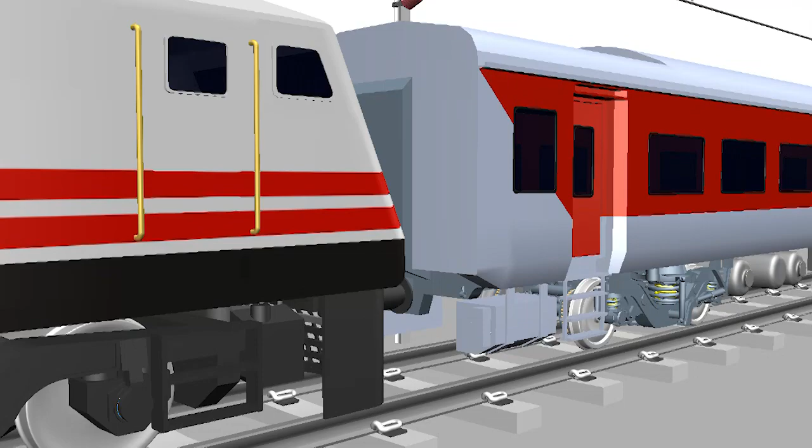The free vibration of the railway bogie is an important area. That's why a suspension system is used to improve the ride comfort of the passengers. Fiat bogies are used in LHB coaches.

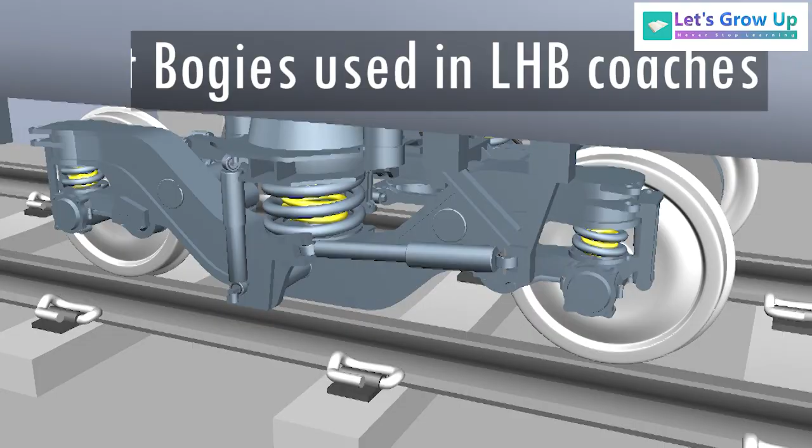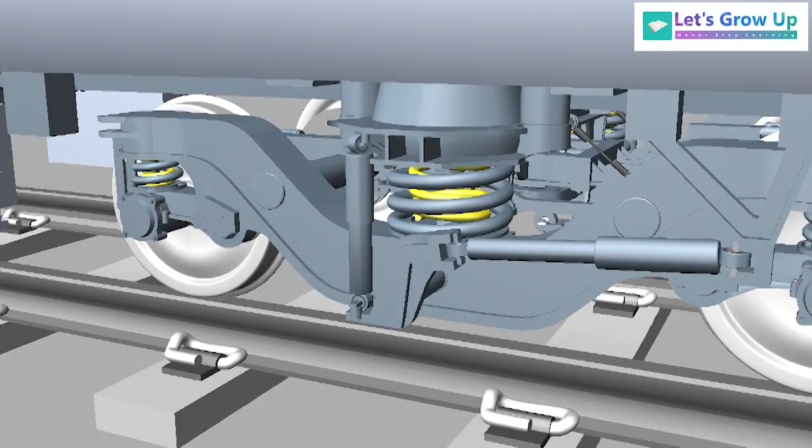It is a two-axle type and two-stage suspension system. This suspension provides a better journey for the passengers. To maintain a smooth and safe journey, an anti-roll bar is used in the LHB bogie. It is a part of the secondary suspension system. Today, in this video, we will learn about the anti-roll bar system.

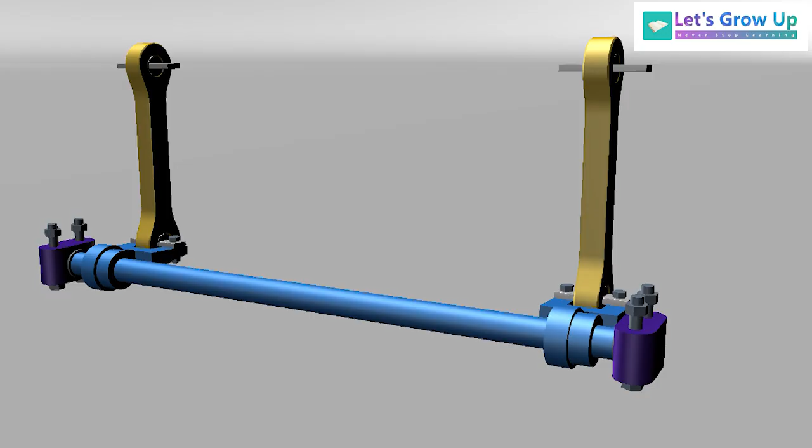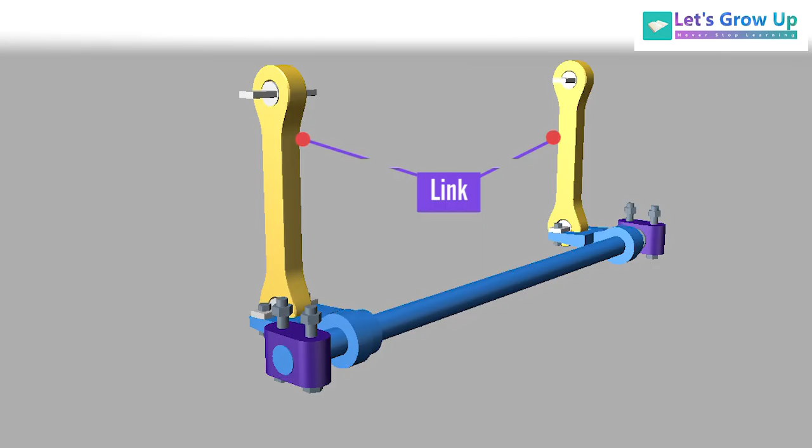It is located under the bolster and between the side bogie frame. The complete anti-roll bar assembly consists of torsion bar, links, levers, and support bearings.

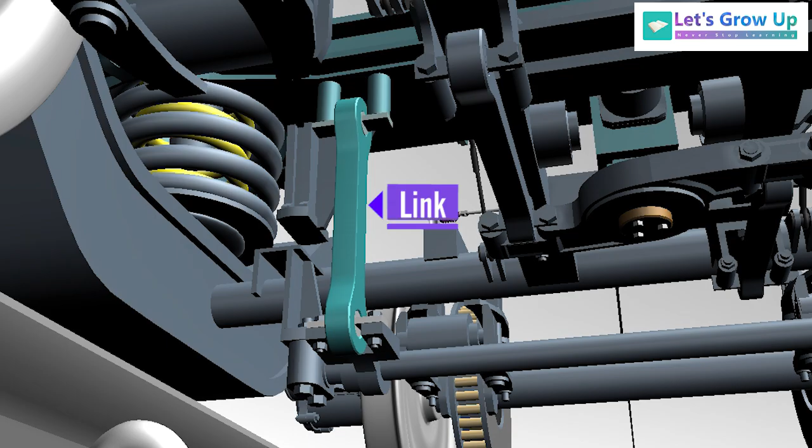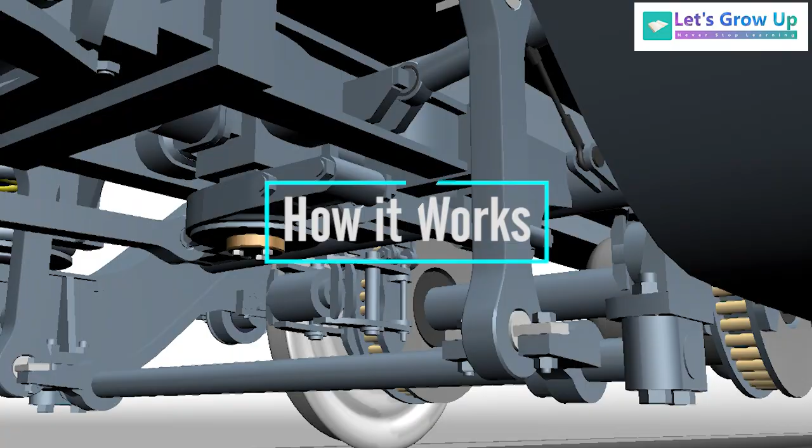The anti-roll bar is connected with the bolster beam with the help of link bars, and rests on the brackets connected with the frame. Let's see how it works. The anti-roll bar helps to reduce body roll when a train is running. Do you know the body roll? I am sharing it through this graphic.

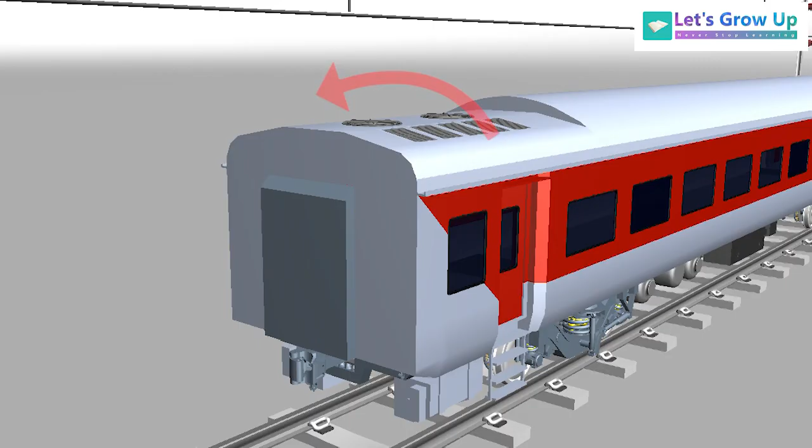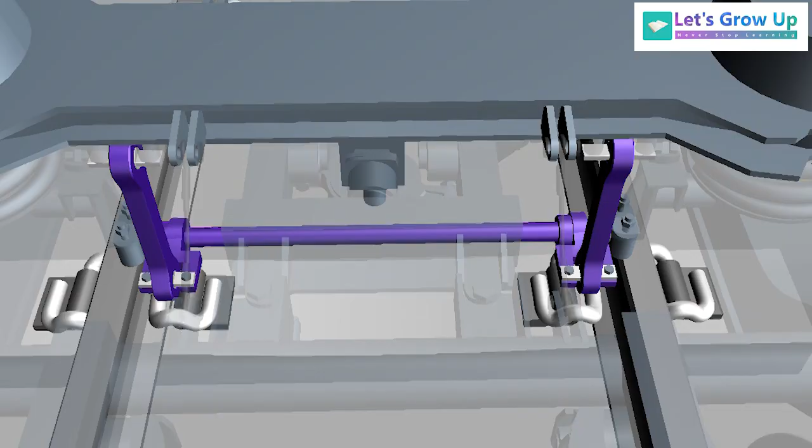See, the coach is attached with the bolster, and the bolster is supported by the secondary suspension. Here the secondary suspension system is used on the side frame. When the secondary suspension works, the anti-roll bar maintains equal movement on both sides by the links, because the links are connected to both sides of the floating bolster, and the suspension moves with the same motion.

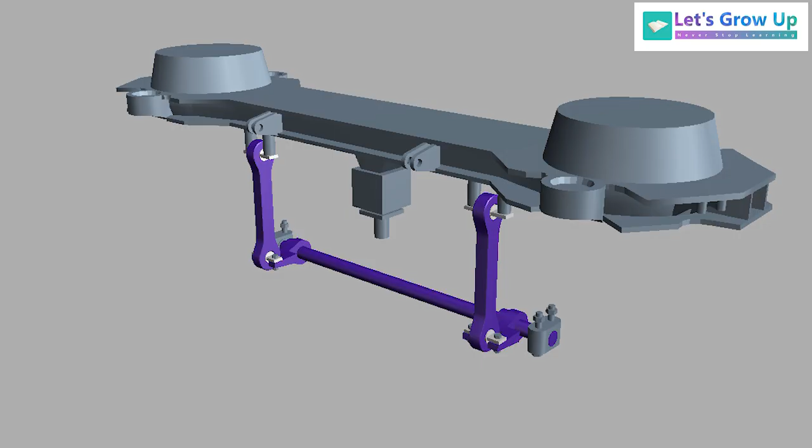One more time, friends, please watch carefully how the links are working. In this way, the anti-roll bar controls the rolling motion of the coach body. Hope you understand the point.